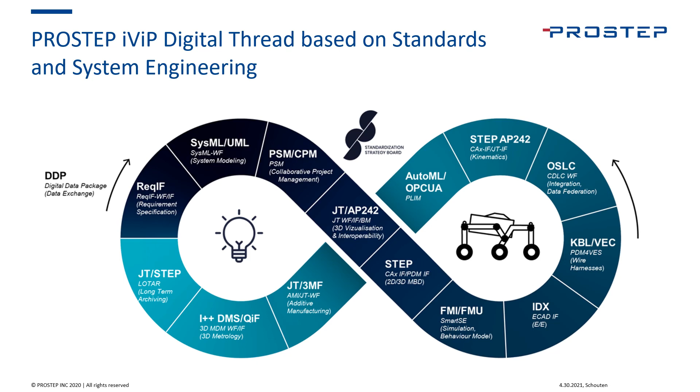One thing that makes PROSTEP unique within the industry is that we are neutral, and we don't resell products of other vendors, but we do have tight, long-running technology partnerships with all the major product vendors. So that includes Siemens. We are a Siemens Foundation partner and support OpenPDM and OpenDXM GlobalX and 3D PDF Generator products to integrate into the different Siemens software. But that also includes the other major vendors. And this leads to us being able and capable of working within these different environments very effectively, and not solely focused on just one, but have experience and know-how over these 30 years of how to integrate these.

So now let's take a look at a little bit of integration strategy. So we're seeing a growing need for digital asset management and integration of those digital assets into what people are calling digital thread or integrated digital enterprise. A lot of that's driven by just complexity in general. So that could be product complexity, more components, more software, more electrical components, different tools used for different purposes, creating different digital assets that need to be managed effectively.

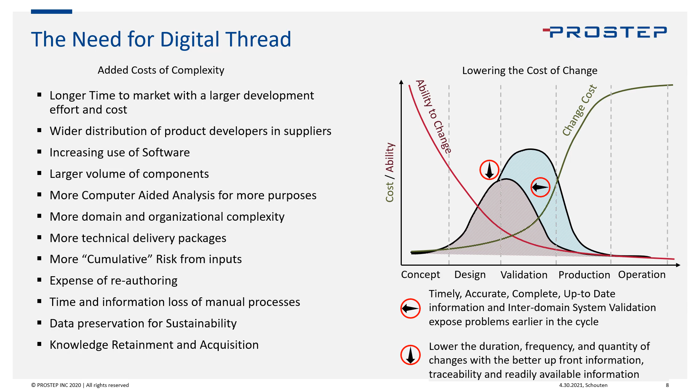And all those cumulative risks, I think, could be solved effectively by allowing that information to go to the user in a timely fashion. So with this digital integration, you can bring the right information to the user who needs to consume it, make sure that they can use that for their own validation, which will effectively make the product better earlier in the cycle, lower the overall cost, speed the development effort, make sure there's not late changes, and really reduce the overall risks that you see from this type of complexity.

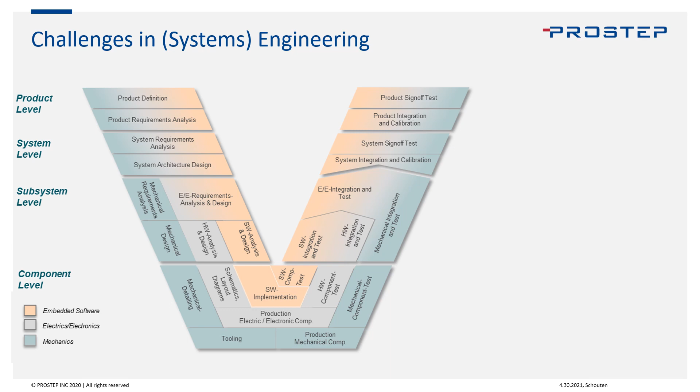There are also different challenges in moving through the product lifecycle and the different domains that exist within there. One of them is this interdisciplinary challenge. So how do you get software, ECAD, mechanical CAD to work in coordination at a specific point within the product lifecycle? But then there's also the vertical model, right?

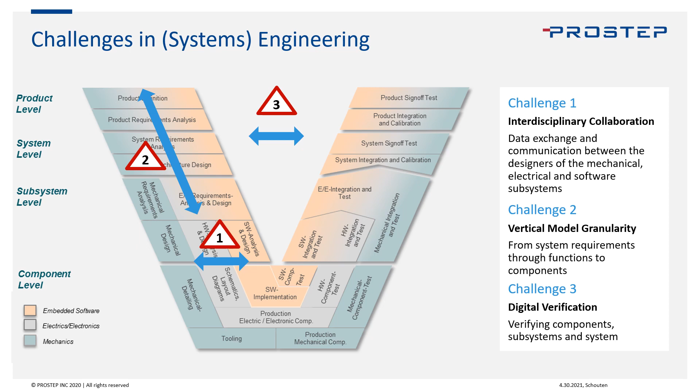So how do you trace from the product definition to the requirements, the functional breakdown to the actual components, and how the system is supposed to be organized, and then the validation of it as well. So bringing back from the analysis, make sure that the mechanical tests are okay, or from the software, the unit tests are working, and then all the way up to the functional sign off, and the product being out and doing what it needs to do. So all these have really unique challenges to them as well. Some of them more focused on supplier collaboration, others internal and breaking down the silos within your organization itself.

So one strategy to use in integrating, which is popular with data exchange between customers and suppliers, is the use of neutral formats. That could be different formats depending on the domain. There's a wide variety of them out here on the chart. They do somewhat suffer from a little bit of data loss, and they're also very domain specific. So if you're focused purely on mechanical design, or on requirements or system models, or integration tests, then you can find a format that works effectively for you.

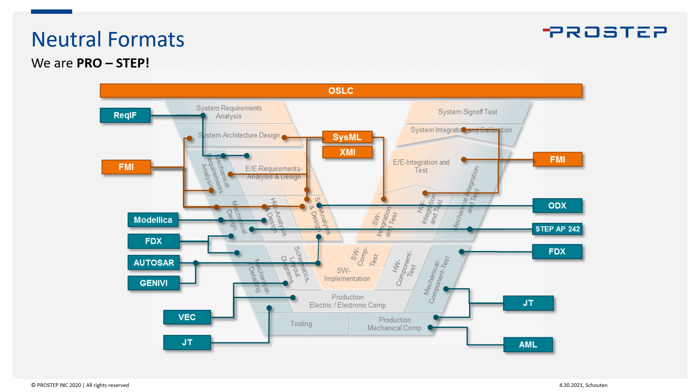But besides probably OSLC, they don't bridge the gaps very well. But they can contain the data in a self-contained binary envelope effectively that can be transported between different systems. And that's an effective mechanism for communicating data.

The PROSTEP strategy and focus on integration is mostly a repository to repository one. That's because if you're using these different authoring tools and different clients, typically you want to master that data in a configuration managed environment like a PLM or an ALM or an ERP, and then have visibility to that data across these different applications and repositories. So once that data is configuration managed, you can use different tools for moving that data. The widely used one is replication.

So that includes the ability to move binary content like files or just data between different systems. Sometimes that's needed because the binary file needs to be consumed by the other clients in order for them to do their job, like CAD data within a manufacturing or analysis system. But there's other techniques like federation, providing just a traceable link so a user can go and look for the data within the other system.

Performing a migration, you could have an integration to consolidate data or transition between the different repositories, or a one-time repository move in order to put it in a more platform type repository and centralize it. We also do translation, moving data to neutral formats like STEP or other types of formats between the different clients, and that's effective for external supplier and customer integrations and data exchange as well. But the core focus is moving data that's already configuration managed within one of these repositories to another one.

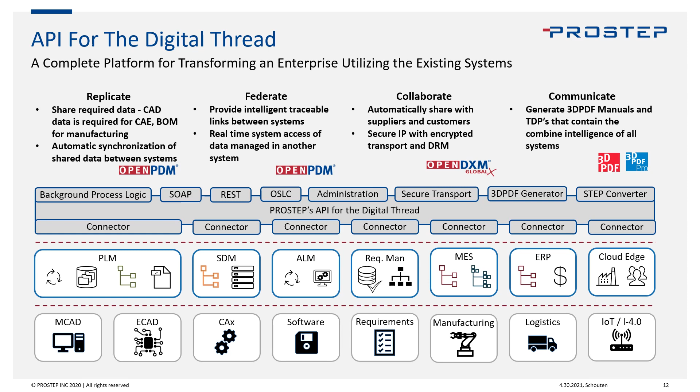So build these packages of data that may incorporate not just what you might think of as a manufacturing TDP or engineering TDP, but data from other sources that can all be utilized in order to perform some specific role task. And so altogether, again, we're calling this our API for the digital thread because we've got these different tools that we can use together in order to build all that traceability and build that digital integrated enterprise.

So we do see some standard use cases in digital enterprise integration that are more common than others. Now, all of them vary a little bit organization to organization on what type of data they need to move, but in general, a lot of them come down to these. The first is PLM to ERP or MES. So taking what you've already developed out of engineering and that engineering BOM and creating manufacturing data within the ERP or MES system. And this is typically the first integration between PLM and anything else.

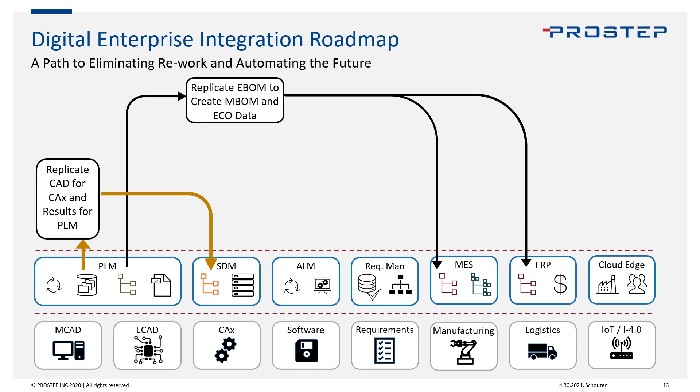Another one that's somewhat common is analysis and PLM. So replicating CAD data, putting that into the simulation data management system so that they can perform tests and analysis on that, and then moving the results back to PLM. We see change dependencies and trying to bridge the data between ALM and PLM to bring software and hardware together. System traceability for model-based systems engineering to allow for validation within those systems that might bring in traceability to artifacts that are throughout the process. So that could be software artifacts or requirements or test cases or design artifacts.

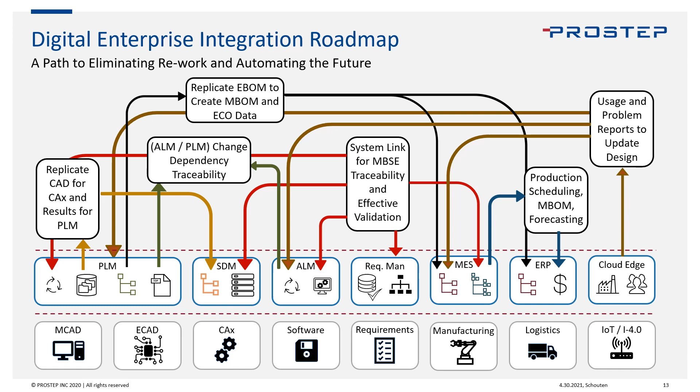And then production scheduling, forecasting, and then cases bring in data either from manufacturing with Industry 4.0 or IoT and sensors on products that are out in the wild that are driving changes in how to manufacture data, or changes in software to make it better, or changes in mechanical designs as well that might prevent the problems that are out there.

So with all that in mind, let's take a look at some of the products that we use in order to solve some of these integration challenges. So PROSTEP offers three core products to create this integrated digital enterprise. The first is OpenPDM on the right. This is a set of off-the-shelf connectors and toolkit internally in order to process data that enables replication and federation and migration of data between different systems, including Teamcenter.

We also offer OpenDXM GlobalX on the upper left. That's a secure data exchange platform that can then also do automated exports and imports and send them to the customers and receive them from the customers and suppliers. And then also our TDP generator with our PDF Generator 3D that can take data from different sources. That could be Siemens Teamcenter, but then also other types of sources to come up with a kind of role-based document system that can publish to other users that don't have access to that data natively, and they want to see it either in HTML5 or within a PDF.

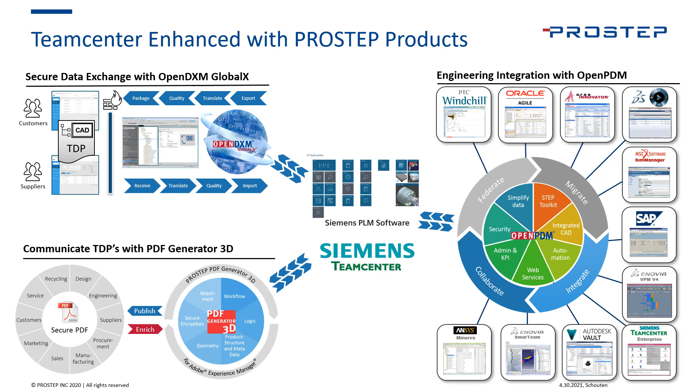So OpenPDM Teamcenter integration uses a variety of different interfaces in order to enable the right type of data to be exchanged. Primarily, we use our Teamcenter connector, and that interfaces to the Teamcenter SOA interface. And that SOA interface is kind of how a portal client would interact with Teamcenter and supports a lot of that functionality. So creation of the items and revisions and changes, data sets and other objects like that.

But then also we have our controllers that are used for different types of CAD. The UG clone controller for NX that enables NX to be exported or imported, or our CAD controllers for CATIA, Creo, and SolidWorks that use the Teamcenter integrations and the batch APIs for those in order to interoperate with those to make sure that that CAD data is effectively exported and imported as it should be.

And then all the standard tools of OpenPDM can be leveraged along with that. And that could be automating processes to do replication or integration or migration, with staging databases, creating STEP from our STEP toolkit, or just exposing it with web services to Enterprise Service Bus or other consumers of that data with our connectors.

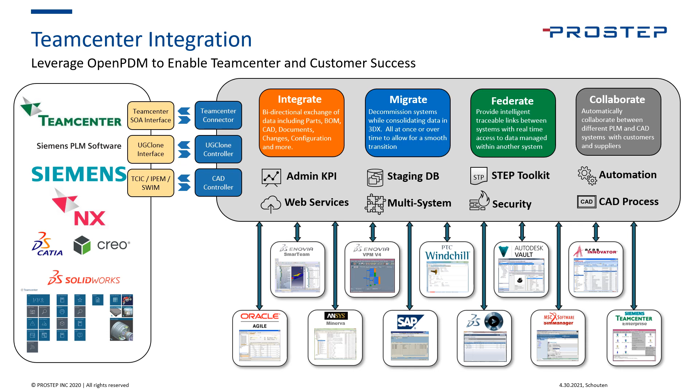So the power of OpenPDM is really fundamentally at the different connectors, and that each connector has the same standard interface of same data model, same set of queries in order to work with these systems. So if you're pulling data out of one system, you can easily transform it and put it into another because it's already within this neutral format.

And then you can plug that into our OpenPDM process server or another type of process engine in order to come up with these multi-system workflows in order to move data between the different systems to get them to where they need to be. So that could be you're combining different CAD data from one system, ERP data, ALM data, bring that together, and then push that into another system. Like in this example, maybe moving different data from these systems into Teamcenter.

We also have mapping services and batch services to enable the easy transformation of the data in that neutral data format itself, or to translate data, maybe create lightweight representations, or generate STEP data in order to move it between.

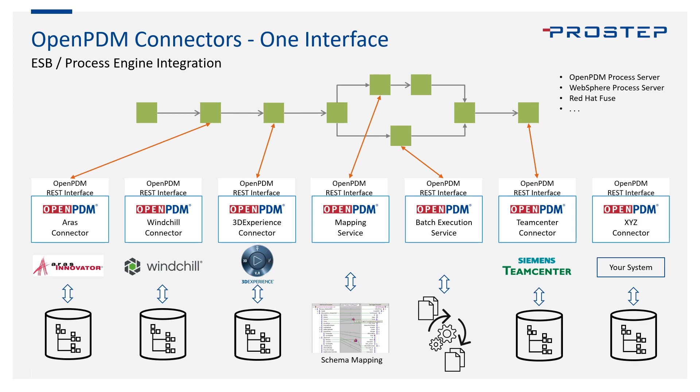So moving on to collaboration with suppliers and partners and customers. We offer our OpenDXM GlobalX secure exchange portal. And this is a toolkit that you can use in order to exchange all sorts of data securely between your organization and others. We try and make it easy to use, making it easy to adopt. We've got Outlook plugins, right-click and send to in Windows, Dropbox-like folder shares, and then also deeper integrations to PLM.

So we've got a Teamcenter client integration that enables you to package up data that you would want to send, and then with that, specify where you want to send it to, and then GlobalX will, behind the scenes, use our different connectors in order to export the data in the right format, transform it into something that maybe your customer demands it might be in, with the right quality checks, the right environments, those type of things, rename files if it needs to, and package it up, and then send it securely over to them.

And then the same on the way back, right? So this portal enables you to have a place where they can securely drop data, and then have automated processes evaluate that data, check for the quality, do comparisons of what's already existing, and import the data into Teamcenter. And this works with CAD data using our UG clone and TCIC, IPEM and SWIM interfaces. And then also other data, right? Like STEP data, JT, other types of data sets as well.

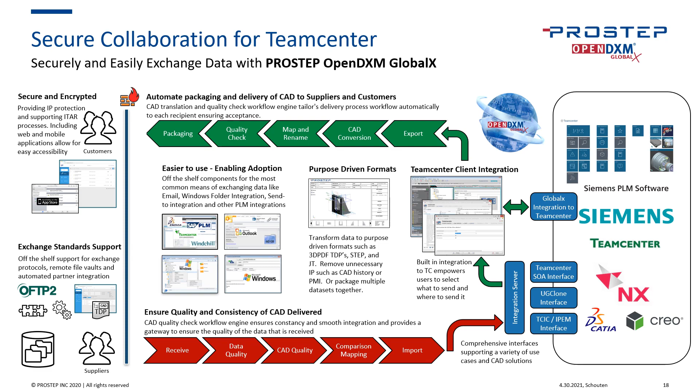We can also combine this with our PDF generator in order to generate TDPs, in order to ensure compliance on technical delivery, or to really get rid of the data that you don't need out there and kind of package it up so you can have the right data with the right role to the right user.

To expand on that a little bit, our 3D PDF generator suite also utilizes the same interfaces with our Teamcenter connector and our CAD controllers in order to pull data out, push data in, and allows you to generate TDPs. This could be your standard manufacturing or design TDPs, but then also could include other sources, right? Could include ERPs for quote information that includes maybe PLM data. Could also be used in order to archive data or deliver it to a customer in a format that they use and for permanent record of the design.

Could be used to capture different work instructions, analysis, maintenance manuals, and we have some automated processes that can kind of combine the data between those sources in order to have the right steps, and then a client that we can use in order to animate it if you need to for work instructions and maintenance manuals.

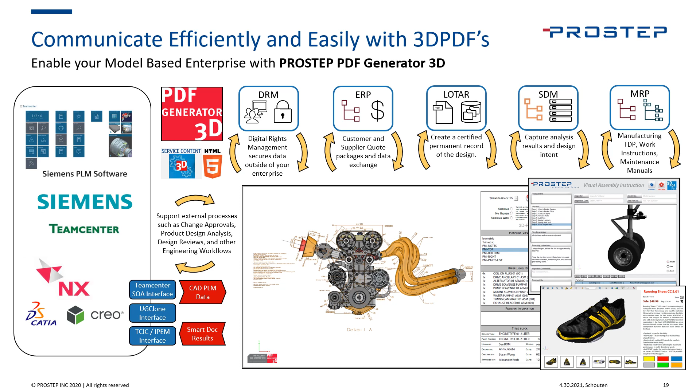So finally, we'll showcase some integration examples.

So our first demo is CATIA V5 integration with Teamcenter. And what we're going to do is start within Teamcenter, and we're going to show within the TCIC the CATIA CAD that's stored within here. And we'll load that in CATIA.

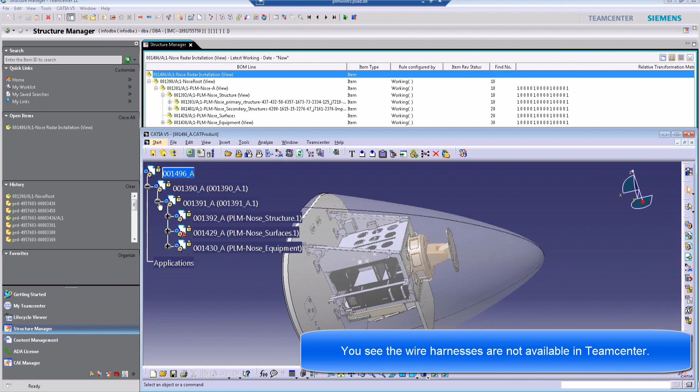And then this enables you to work within the design in CATIA within Teamcenter, but then also maybe push that over for, in this case, an electrical harness that can be added within 3DEXPERIENCE and CATIA and 3DX, and then brought back again into Teamcenter with the final result.

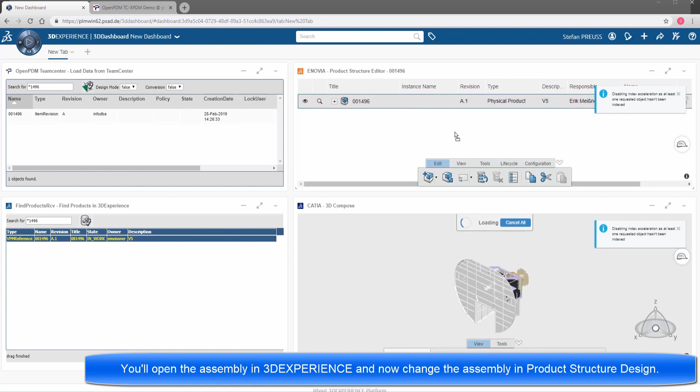So in this case, we're using our little widget that can federate some data and pull the data into 3DX. In the middle here, you see our OpenPDM process server that has the activity that's moving the data. We go ahead and we find that, and we'll load that in 3DX in the CATIA Compose and Product Structure Editor. And then we want to go ahead and add that harness information.

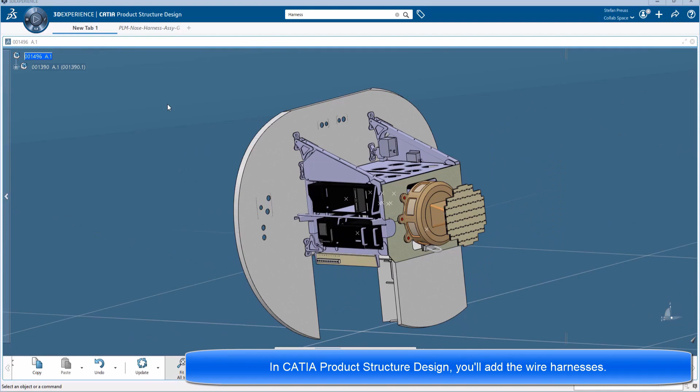So you go and you start modeling it and use the product structure design, add the harness to the nose cone. And then with the harness added, we go ahead and send it back, and we initiate the transport back through the XPDM interface of 3DX.

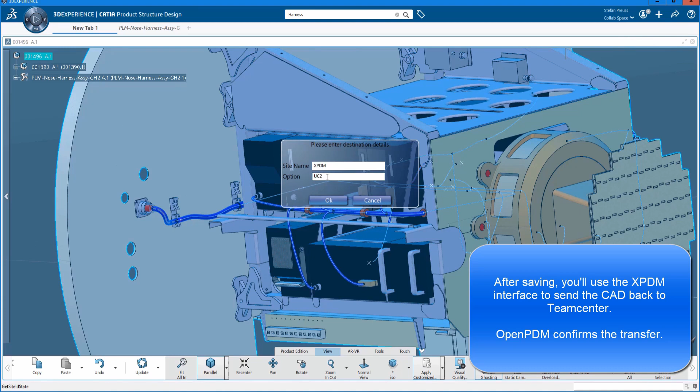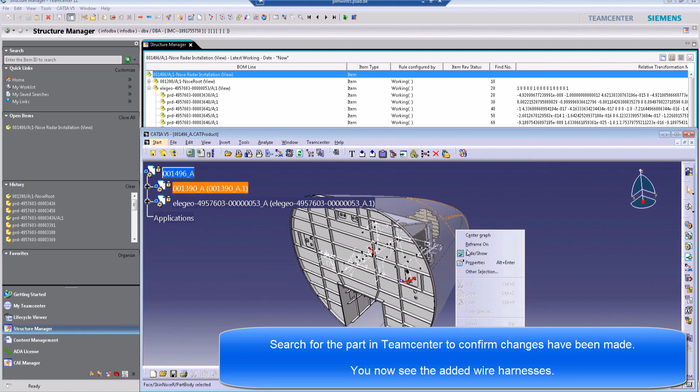And what this is doing is sending it back to PROSTEP OpenPDM. And OpenPDM then is pulling out the CATIA V5 data from the XPDM interface and then importing that through our TCIC controller back into Teamcenter. So what we want to do is show that you can work within both these systems with some bidirectional CAD exchange, and just demonstrate that this is capable.

Second demo that we want to show is the Windchill and Teamcenter Creo integration. What we're doing here is we're going to trigger it from Windchill. We're going to export the data using both our Windchill connector and our J-Link Creo CAD controller. We're going to map it. We're going to import it into Teamcenter with our Teamcenter connector and using the IPEM interface, and then show the final result within Teamcenter. So we're going to start here.

We're in the OpenPDM admin interface and also within Windchill. In Windchill, we can show this alternator that exists within Creo there. We can make sure that it also doesn't exist within Teamcenter, kind of the nothing's up your sleeve. So we're going to go ahead and search for it within the Teamcenter web client. And then go back in Windchill, take a look, open that up in Creo.

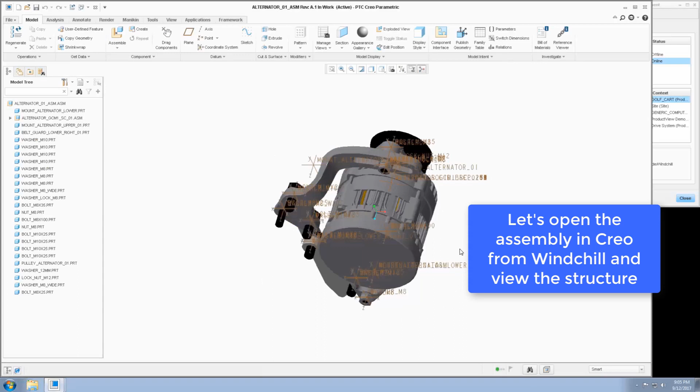When you open it up in Creo, you can see how it's represented, all the components there, and annotations, things like that. And it should be the same, effectively, when it gets pushed into Teamcenter. So we want to show that. So we go ahead. We have this Sync Creo CAD to Teamcenter action menu that we added here just for demo purposes in order to show that initialized.

A lot of times we want to actually automate those. So it could hit a lifecycle state in Windchill or need to be pushed to Teamcenter for another reason, but we don't want to have the user driving that always. We want to have the business process driving that. So we're showing a little bit in the middle. This is our neutral data format, and it's visualized in kind of a graph. That has the EPM document structure that's pulled out of there.

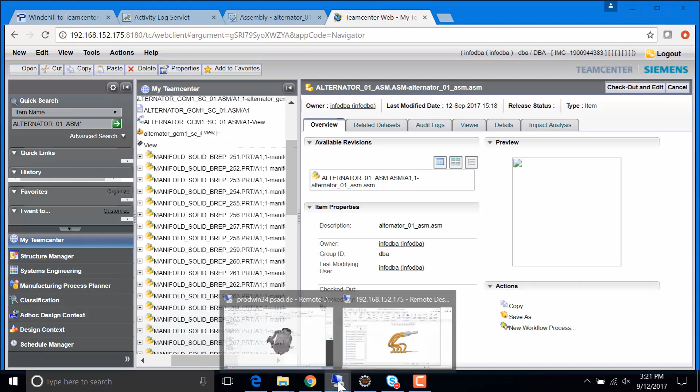So we go ahead, search again in Teamcenter. We find the result. And we are opening this result. We see that all the item revisions have been created in the right order. And then we go ahead and look within TCIC in order to open that Creo data out of Teamcenter as well. So we go ahead and we find that, select it, open it up, and we have the same thing that we opened up previously within Windchill, now available within Teamcenter.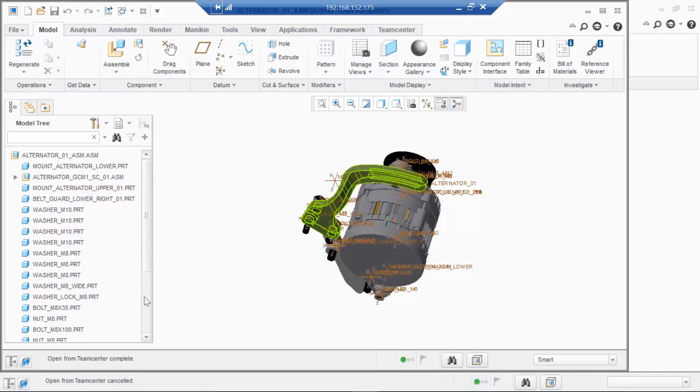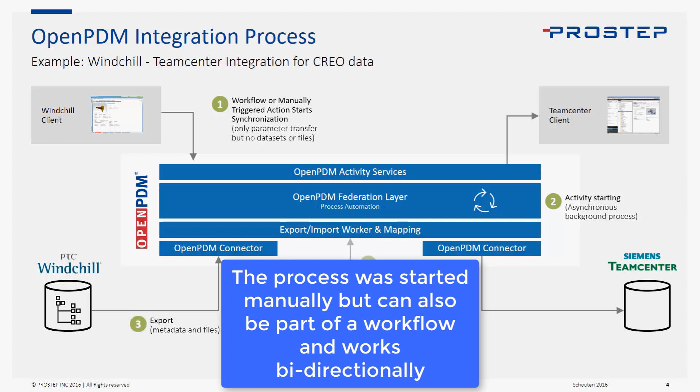So this process is also bidirectional, right? So we can pull similarly data, could be Creo data, could be NX or CATIA, out of Teamcenter, and push that back as well. Or, for TC for Sim, work with result sets that might be, like, documents.